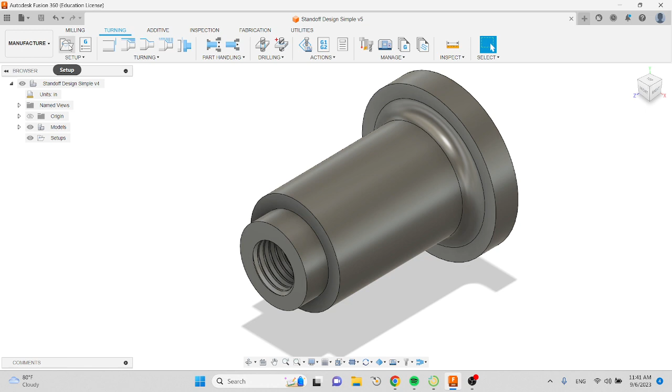You're going to click Setup, that's this little folder right here. Go to where it says Operation Type and make sure that it's set to turning. Automatically, it should create a cylinder around your material.

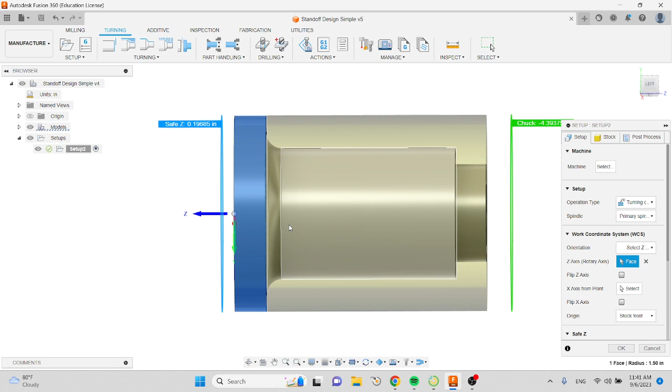Now, if you look, my Z direction, positive, is in the wrong direction. And my chuck right here is shown on the end that I'm going to be cutting. So those of you that have already cut this product know that I'm going to be cutting on this end. So I need to flip my Z direction.

So you're going to go over here where it says flip Z axis, and you're going to click this checkbox. Now I see that my chuck, or the place that I'm going to be holding it, is on this end, and the part that I'm going to be cutting, the Z face, is going to be on this end. So here's where you can flip the direction of my Z axis.

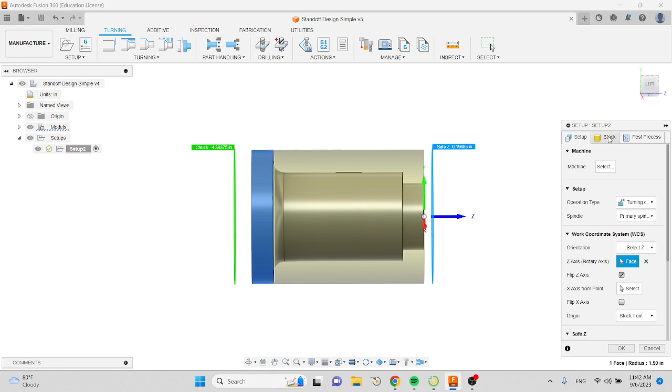Now I'm going to go over to where it says stock. This is where you can determine if you're using the correct stock diameter, which is 3 inches, so that is correct. And since we're going to be facing a little bit of this end as our first operation, I want that material, my starting material, to be a little bit longer than my finished product. So I'm going to go ahead and tell the length to be 4.1 inches. So now you can see that stock overhanging just by a little bit.

Make it a habit to always change this rounding up to 0. You won't see any change in this design, but in future designs, that can really throw people off.

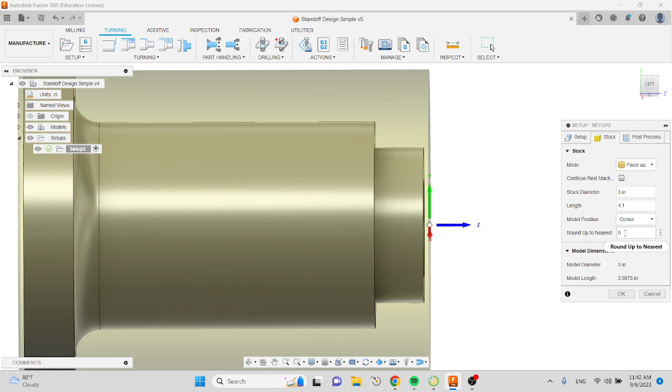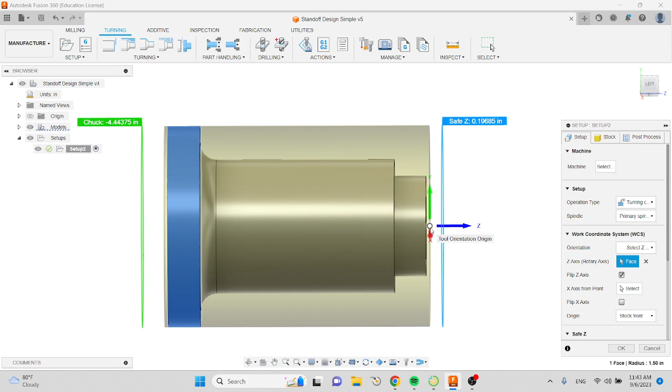Go back to Setup. There's nothing else that we're going to change here, but you'll notice that the origin has been defaulted to the front of the stock. So that's going to be where we zero our program. But you could change it, and that's where you would change it if you needed to, but we're going to leave it right there. You're going to click OK.

So you're going to see a silhouette or a shadow of our starting material, or our rough material, as well as the model inside. Now we're going to bring in our tool library that you should download from Schoology.

So if I go to Schoology, go to the assignment Wall Mural Standoff, you're going to download this file. It's called WHS CNC Lathe Tools. I'm going to download it to my downloads folder. I already did that.

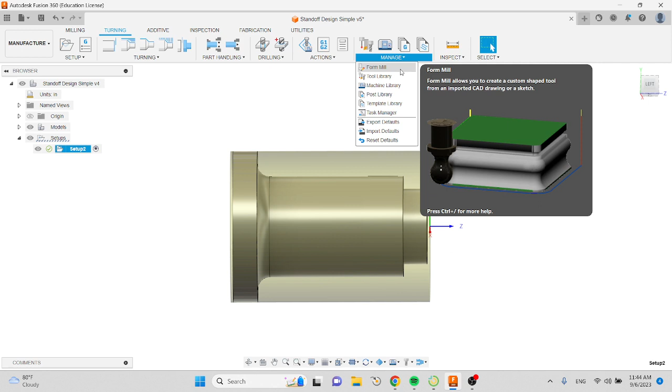In Fusion, as long as you're in manufacture mode, you should be able to go up to the Manage toolbar, and you're going to go down to where it says Tool Library, and you're going to open that.

I have a lot of tool libraries, but you might not have any under where it says Local. You're going to right-click under the word Local, and you're going to import. Find your downloads or wherever you downloaded it to, pick it, and open it. I already did that, so I'm not going to do that in this video, but you're going to open that. And then you should see... actually I will do that, because I named it different, so there it is.

So now you'll see 3 different tools: tool number 2, a right-hand tool, a neutral tool, tool number 3, and then a grooving tool, which is tool number 4. You can close this window.

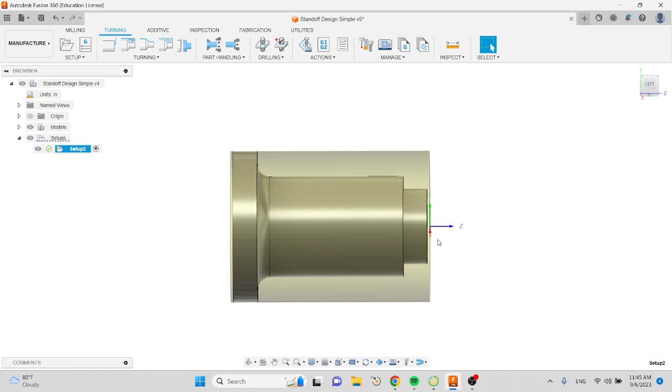Now we're going to create our first toolpath. Our first toolpath is going to be a facing operation. Facing is what just removes that front material off of this. So we're going to go up under turning, and we're going to do a turning face.

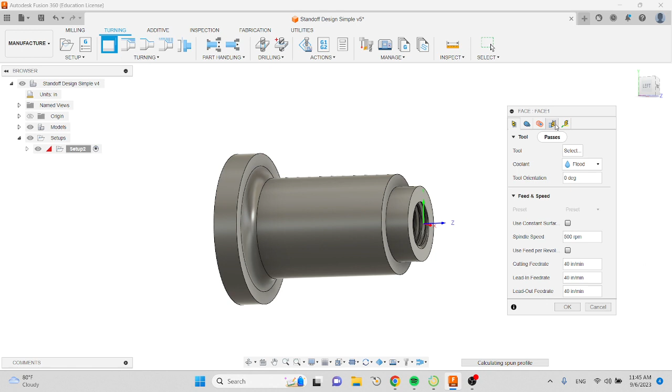This window pops up with all of the adjustments that we can make to the toolpath. The first window is always your tool selection, so we're going to select a tool. Go to the WHS CNC lathe tool library that you just imported. For this whole part, we're only going to use tool number 2. And you can come down here and pick the aluminum presets for surface speed and cutting feed. We're going to select that.

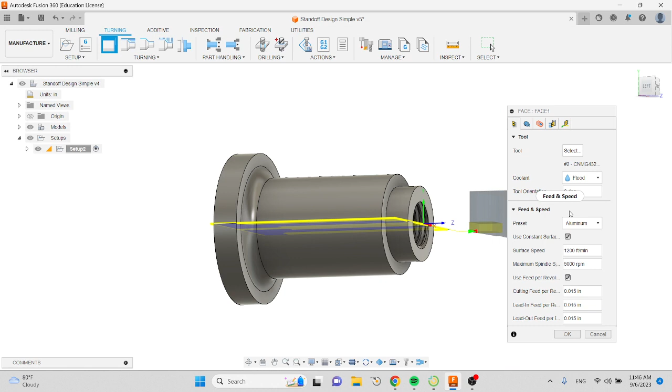It's going to give you a preview of the geometry, as well as the tool location. I'm zoomed at the underside of the part, so I'm going to fix my zoom so it's as if I'm standing in front of the machine.

You can scroll through these different menus, but there isn't really anything we need to change, because by default most of the lead-ins and lead-outs are okay for what we're doing. So I'm going to hit OK.

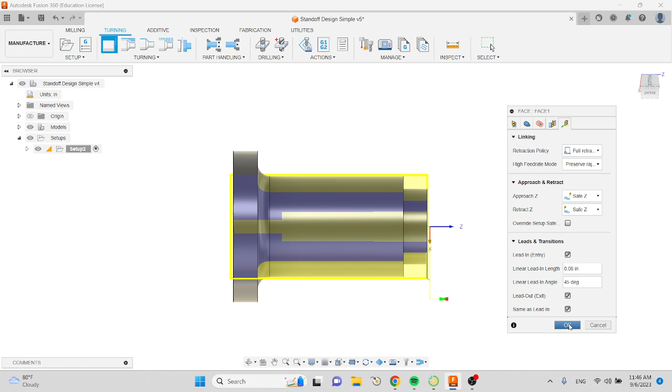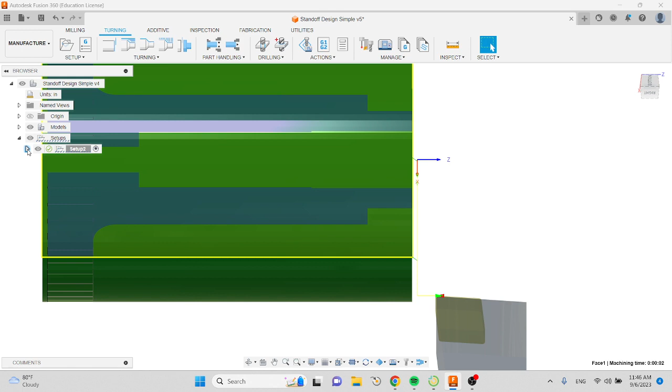I want to be able to preview and see what this is going to do. I can see a yellow line representing the movement of the tool as it does its facing operation. But if I wanted to simulate it, I could right-click under Setup. If you don't see facing, expand underneath Setup and you'll see the facing operation. If I right-click, I can go up to Simulate.

Under the Simulate tab, there's a few different things you can change. I can turn on or turn off the stock. That's going to show me my rough material.

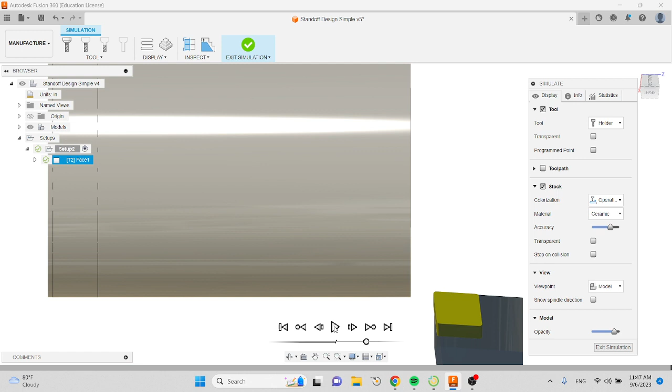If I click Play, it's very quick, but it shows you the simulation of that tool moving through the operation. I can slow it down by sliding this bar. That's really slow. But you can also detect whether it's going to hit anything, and also the depth of cut. That looks pretty good. I'm going to exit.

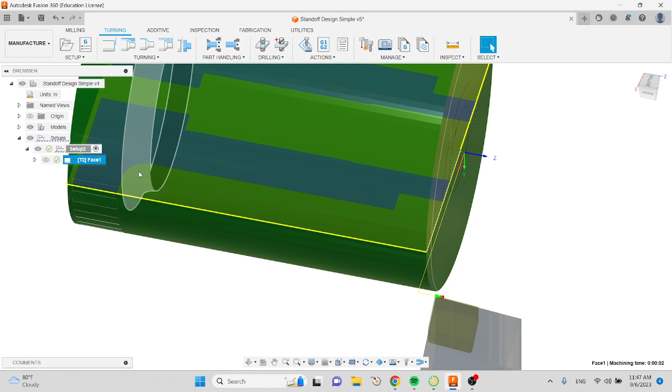Now I'd like to do a rough turn on the profile of this geometry here. So I'm going to go up to Turning, and you'll notice there's a Turning Profile Rough. I'm going to pick that.

I'm going to go ahead and pick my tool from the library. Same library, same tool. I'm going to pick aluminum and select it. It automatically detects the geometry from the model.

Now, the only thing I need to change, if I scroll through each of these tabs, is on the 4th tab. If I come down here, it says Stock to Leave. As it cuts all of this geometry, it's going to do it incrementally, so it's not going to remove all of this material in one cut. It's going to cut it slowly, going a little bit at a time.

But on its last pass, because I have this box checked, it's going to leave 0.04 of an inch in the X direction and also in the Z direction. That's because I'm going to do one more operation, called a finishing pass, that will clean it all the way up to the finished wall. So I'll leave this for now, but when I do my next operation, I'm going to turn this off.

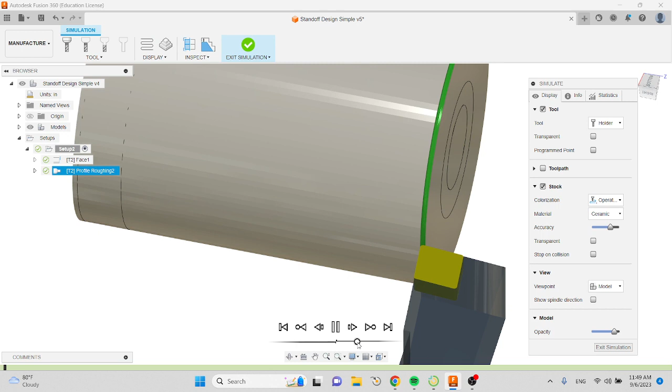So let's click OK. You can see the preview of all the different passes. If you'd like, you can right-click and simulate it. Play it, maybe speed it up a little bit. I'm going to exit that simulation.

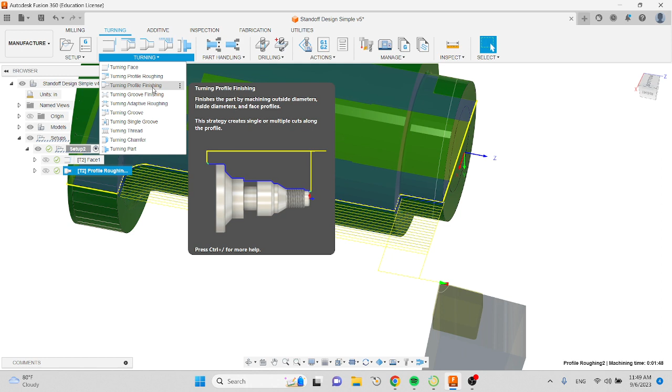It looks good. So remember, there is 0.04 of an inch of material surrounding the body of this model, so it is not finished. So I'm going to go up to Turning, Profile, Finish. And if you read that, it says it finishes the part by machining outside diameters. I'm going to click that.

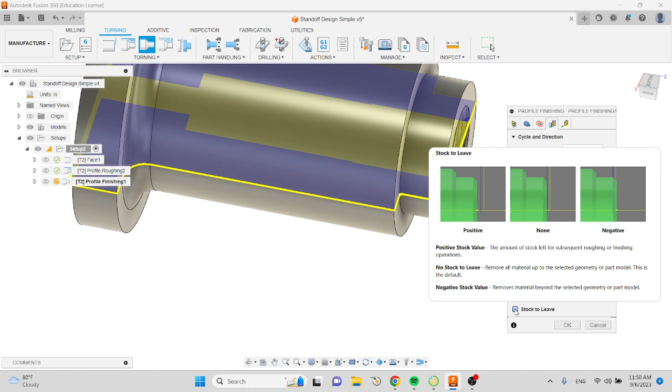I can reselect that same tool, WHS CNC lathe, tool number 2, aluminum. Now remember, I need to go to the fourth tab, 1, 2, 3, 4. It says Passes, and it already turned off Stock to Leave because it's a finishing pass. So that's pretty sweet. Thank you, Fusion, you're doing the thinking for me.

I'm going to click OK.

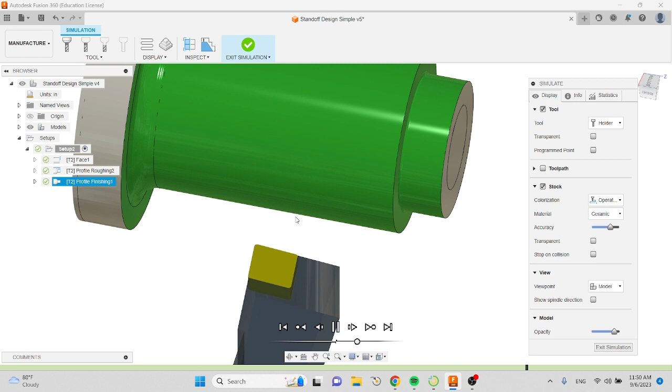Notice if I right-click and simulate the finishing pass, it's only going to do one cut. I'll slow that down, that was pretty quick. It's only doing one cut because the previous operation, right here, has already removed all of the stuff that was in its way. So I'm going to exit this simulation.

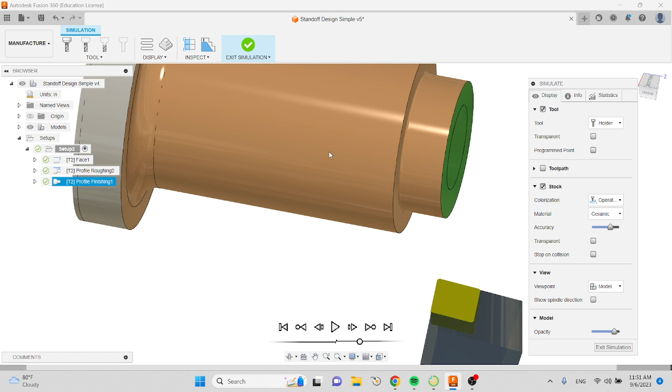If I press Shift and highlight all of these operations, I can now simulate all three of them. There's the facing, there's the roughing — I'll speed that up — and then there's the finish. Each of them has been color-coded separately so you can identify which operation is being simulated. I'm going to exit.

And this is a complete toolpath. All that would be left is to generate the code that goes over to the machine, which we'll do in a separate lesson. I think this is about as far as we'd want to take it.